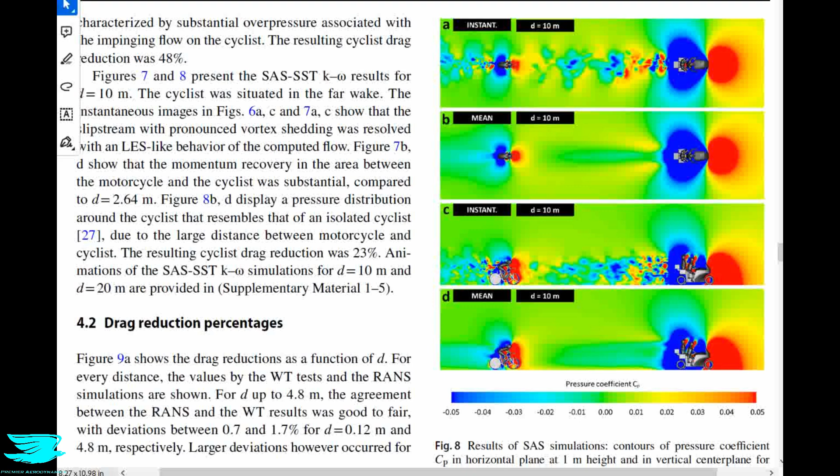That is what we're looking at today. Do the motorbikes in these cycling races affect the outcome of the race through their aerodynamic effects? To find that out, we're looking at this paper called Aerodynamic Benefits for a Cyclist by Drafting Behind a Motorcycle.

While the primary focus of this podcast is how these motorbikes affect a cyclist's aerodynamics and a race's outcome, as you'll see later, the CFD in this paper is really terrible, and in my opinion it has been massaged to make it look better and make it seem like there aren't as many errors as there really are. That's my opinion, and I'll go through why I think that later in this podcast, and you can make up your own mind.

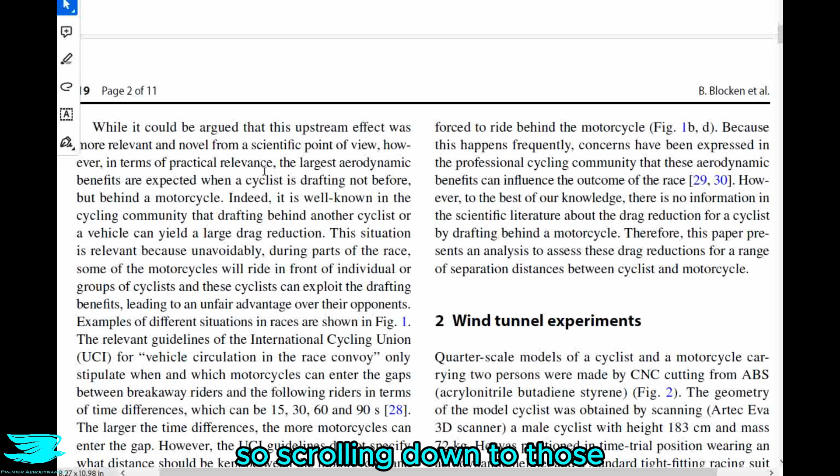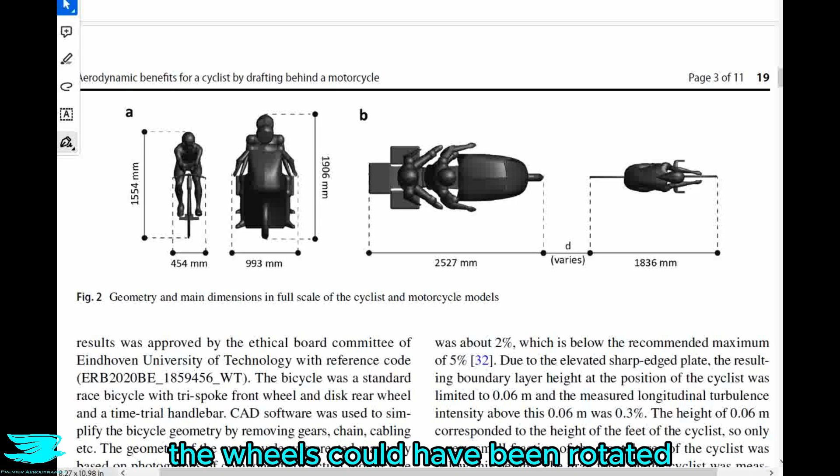Their rider and motorbike wind tunnel geometries can be seen in figure 2, so let's scroll down to those. Here we go. I can't find any mention of the rider moving its legs during the wind tunnel experiments. I mean, it's not a real person, but if you had a moving ground, the wheels could have been rotated, allowing the legs to rotate normally. But in figure 3, we see the geometries installed in the wind tunnel, and it doesn't seem like there's any moving ground—the cyclist is just on a turntable. So that is a major limitation to this study.

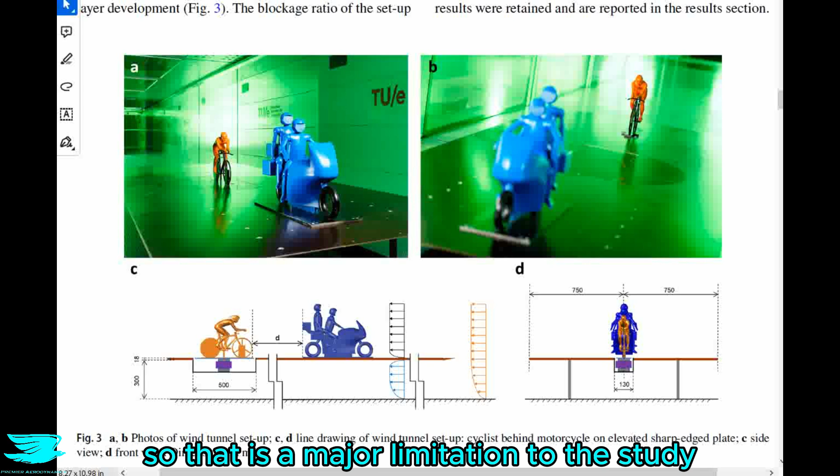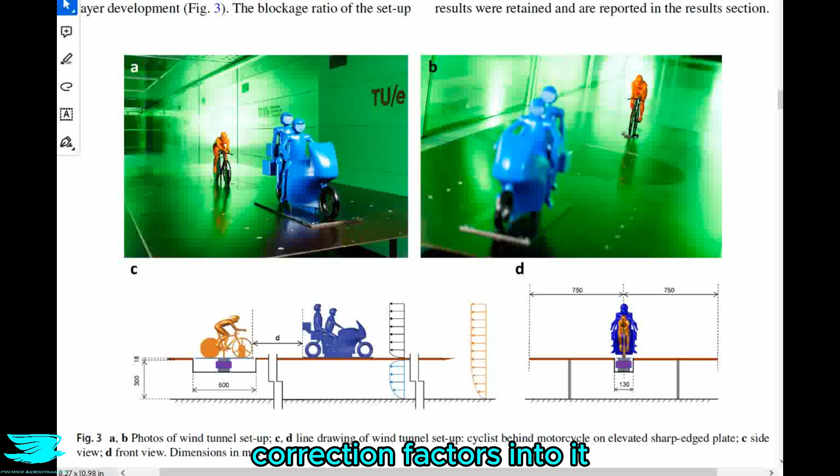The cyclist is static. Nevertheless, it still gives us a good idea about the kind of drag effects we can expect. The cyclist and motorbike setup was a quarter scale setup, resulting in just a 2% blockage ratio, which is really low, and with that blockage ratio you usually don't need any wind tunnel correction factors. The turbulence intensity was 0.3%, much lower than what you'd expect in real life considering the cyclist would be in a regular environment. But because it's in the wake of the motorbike, the turbulence intensity doesn't directly affect the cyclist here.

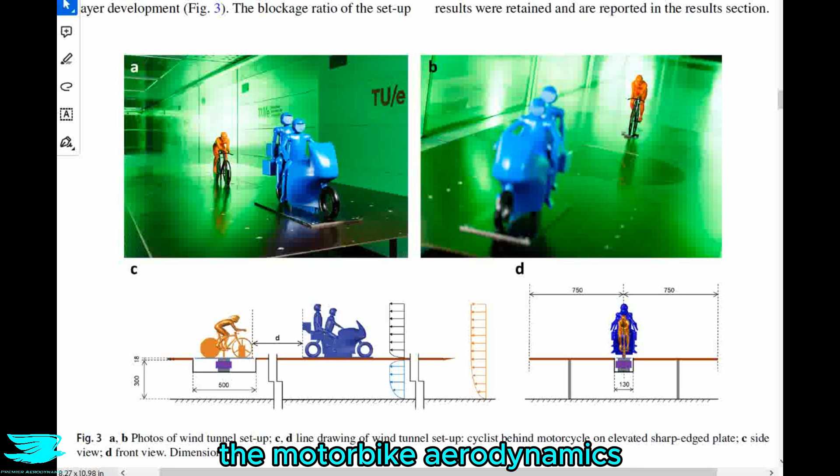So the question is, does the turbulence intensity affect the motorbike aerodynamics, which would then affect the cyclist in sequence?

So the turbulence intensity does affect the motorbike a little bit, but because it is so bluff and the actual geometry of the motorbike setup changes all the time, depending on the people on it and the equipment, I don't think it makes too much of a difference here. This is more a general investigation and not a specific setup for one particular geometry.

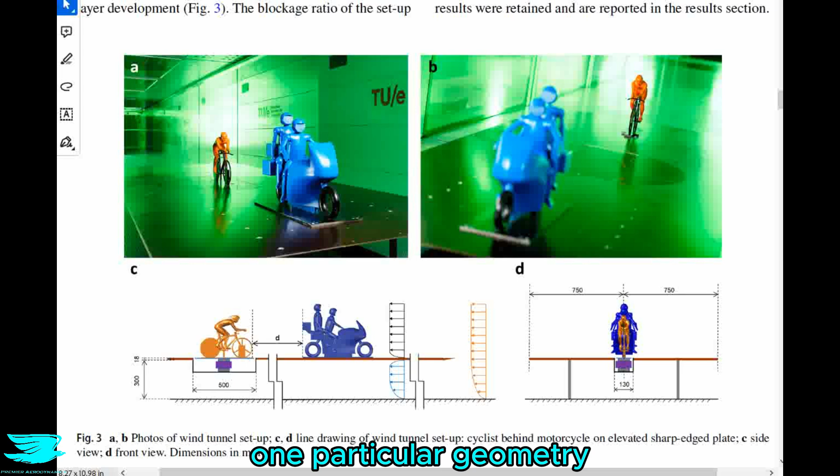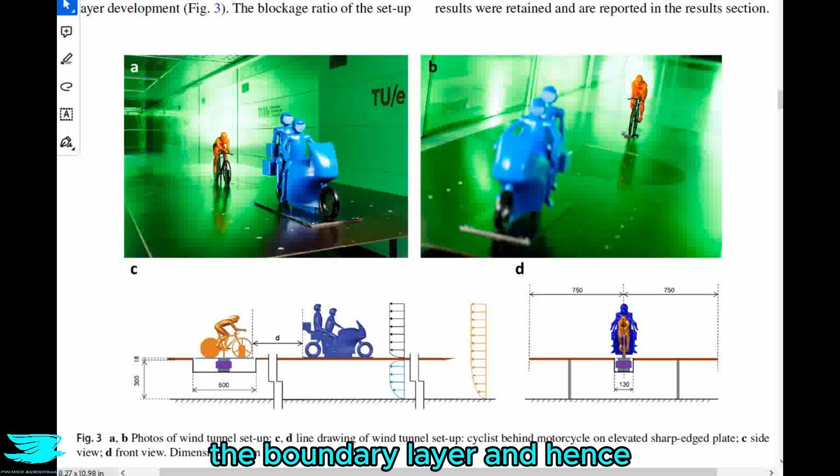So the results here, because of this turbulence intensity level, are still applicable from the point of view of being general. One thing important to note is that the boundary layer in this wind tunnel is a little different to what you would expect. They say that as the flow reaches the cyclist, the boundary layer is building up to about the cyclist's feet. So these researchers say that as such, a very small fraction of the cyclist setup is in the boundary layer, and hence they suggest it doesn't really matter too much.

But I think this still poses a bit of a problem. To begin with, a cyclist won't necessarily see a boundary layer, only if there is a wind with a boundary layer developing over the ground and then impacting the cyclist. So we can conclude right there that with this particular setup, this matches if there is a headwind.

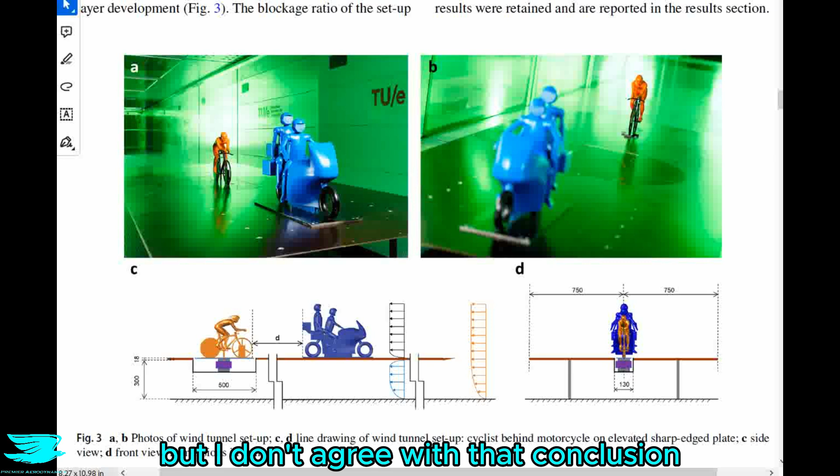But what if there was no wind? Is the boundary layer here still okay? From what I can see from the researchers, it seems like they're implying these boundary layer effects are negligible, but I don't agree with that conclusion, and I'll give you a real life example to show you how connected a boundary layer is to the rest of the flow physics over an object.

Many years ago, I went to one of my friend's offices to go to lunch, as we did all the time, and this time when I got there, he was deep in thought about why something was happening to the flow over an object he was researching. He was investigating the aeroacoustics of cylinders at the time.

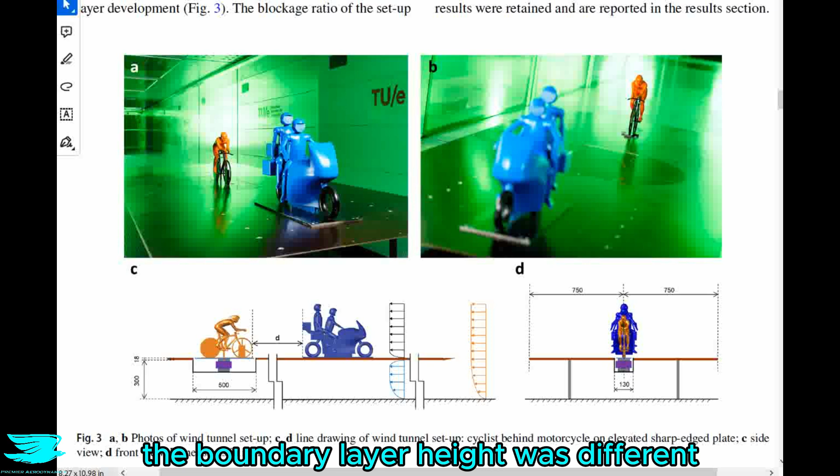What he was finding was that depending on the roundedness of the top of the cylinder, the boundary layer height was different. The strange thing is that the distance between the top of the cylinder and the boundary layer at the base of the cylinder was really far, relatively speaking - like 10 cylinder diameters away. So why was there such an effect? How could the top of this object affect the base so much and the boundary layer?

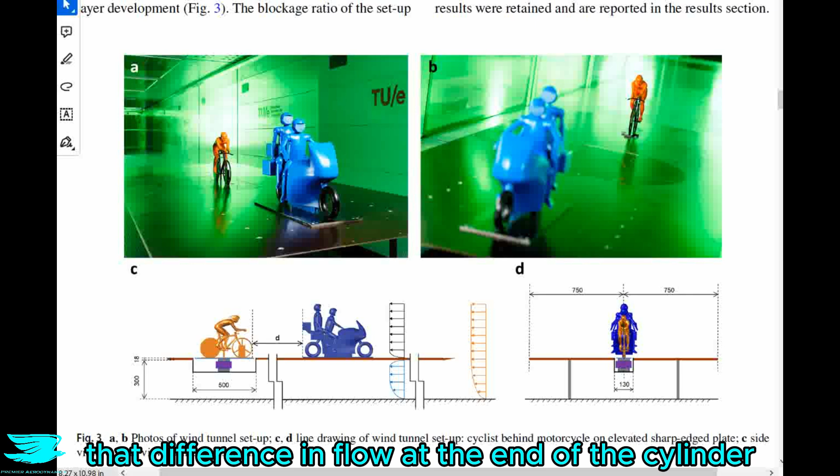Well, we thought about it and we were motivated by hunger, so we figured it out pretty quickly. We found out that the flat end of the cylinder made the flow separate compared to the round top, which allowed the flow to stay almost completely attached. That difference in flow at the end of the cylinder created a different pressure, and hence those pressure differences pulled the boundary layer up by different amounts, making the boundary layer a different height.

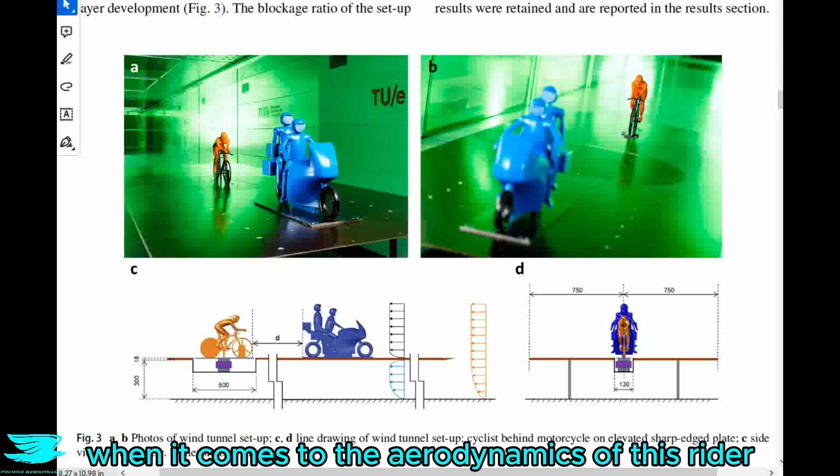So that literally means that something going on at the other end of an object can still affect the boundary layer, which shows you just how connected the flow physics is over an entire object, and the importance of a boundary layer is well known in so many different fields. That is why I'm not convinced that this relatively small boundary layer is negligible when it comes to the aerodynamics of this rider. Its presence could easily change how much the flow gets squashed. As such, I think the boundary layer will introduce probably a couple percent error here.

So anyway, one cool thing they did was test at different velocities, from 15 meters per second to 30 meters per second. They noted that above 20 meters per second in this wind tunnel, the results were now Reynolds number independent, and they reported those in the results section.

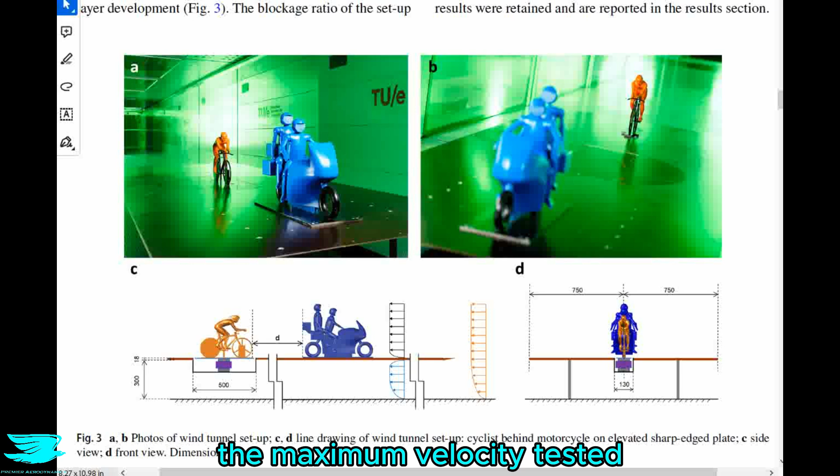Now, when I read that the maximum velocity tested was 30 meters per second, I was a little shocked because 30 meters per second is about 110 kilometers per hour. I thought that was really fast for a rider, so I looked up how fast they do go. It turns out that the average velocity over a 200 kilometer race is about 45 to 50 kilometers per hour. But when you go down hills, they can get over 100 kilometers per hour, and someone even clocked 130 a few years ago.

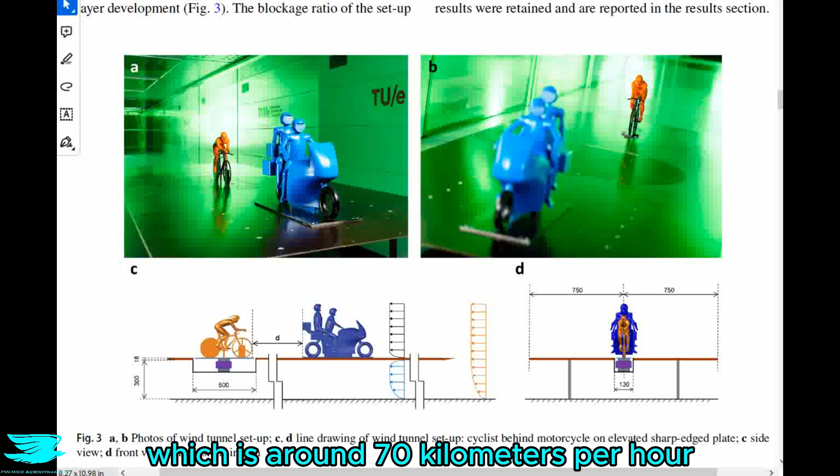So they can get to 30 meters per second, and the Reynolds number independent point here is at least 20 meters per second, which is around 70 kilometers per hour, which is far more normal. So they tested this rider at a number of distances behind the motorbike, with the full scale values corresponding to only 12 centimeters up to 50 meters.

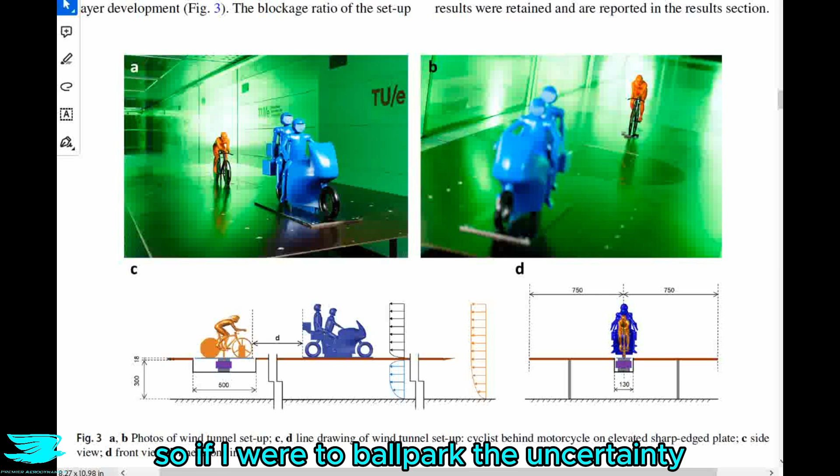So imagine traveling at 70 kilometers per hour, only 12 centimeters behind a motorbike. They say that from their uncertainty analysis, the drag coefficient had an accuracy of 0.8%. That is just the force. There are still other inaccuracies compared to reality, like the boundary layer. So if I were to ballpark the uncertainty of this experiment, it might be around 5% in total to what you'd find actually on the road.

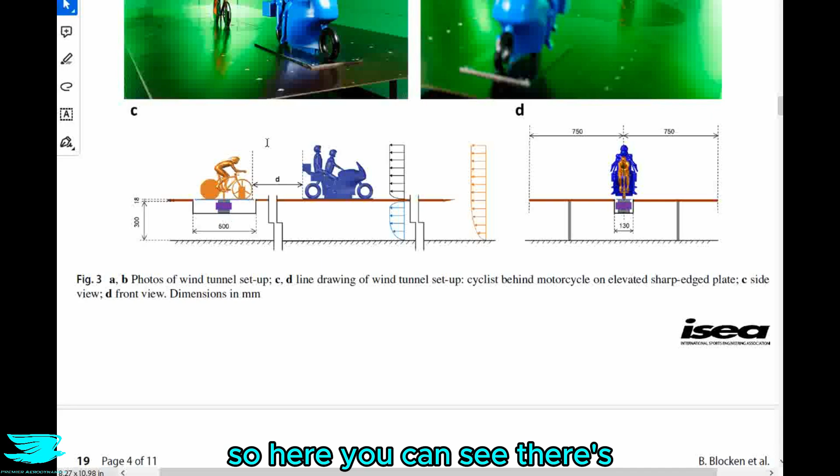With that, let's move to the CFD setup. They did the CFD setup on a full-scale model, and the CFD setup was identical to the wind tunnel setup except for the mounting equipment needed for the wind tunnel. So here you can see there's a few things on the ground which they don't necessarily have in the CFD. They don't need those things.

And in figure 4, we can see their mesh. So one thing that I'm a little curious about is the mesh sizing between the motorbike and the cyclist. You can clearly see that the motorbike is in a square refinement region. That's good. But the downstream region ends quite soon. That's bad. So the cyclist is also in a square refinement region, which also ends quite soon downstream. Then between the motorbike and the cyclist, there is a relatively coarse mesh.

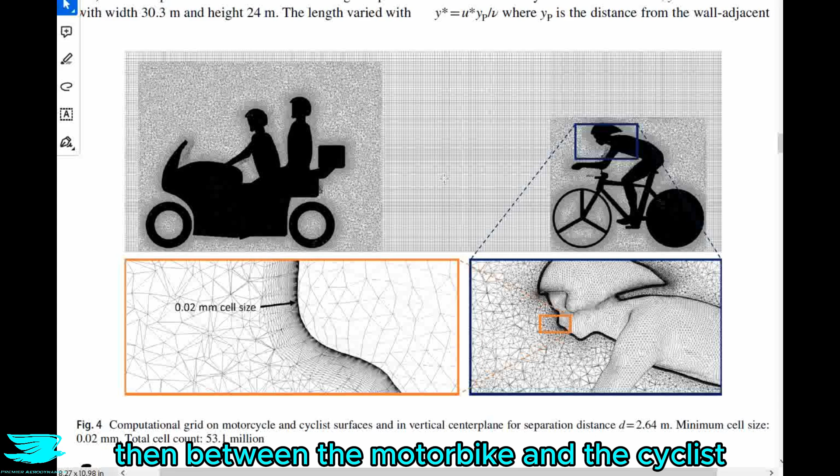So pretty much all CFD simulations need a refinement region in the wake zone to allow the wake to evolve naturally. Here, there isn't this refinement region. And I think this is even more important for there being a wake refinement region here behind the motorbike than most other simulations out there, because the wake from the motorbike is now impacting the rider, which is what we're actually interested in. As such, I would have thought that a refinement region here would have been better, but perhaps they didn't have the cells to spare.

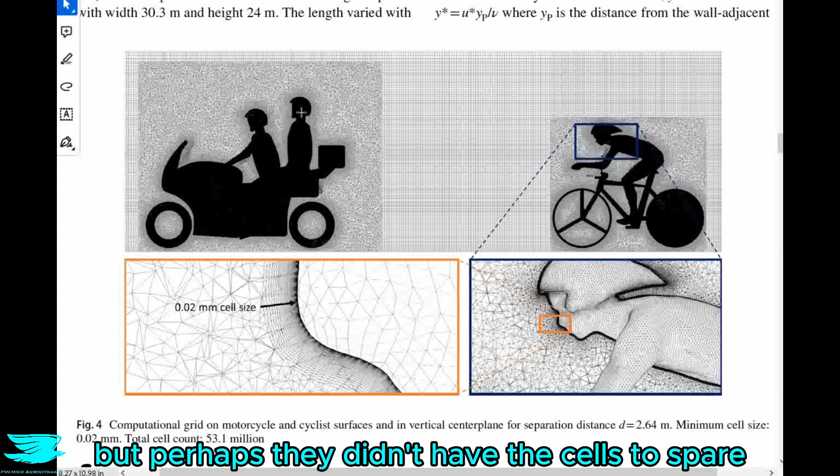Depending on the distance the rider is downstream, the CFD had up to 77 million cells. And they say that based on their grid convergence analysis, which they don't present here for some reason, they didn't need to have this wake refinement zone. But that seems odd to me because pretty much all simulations do need wake refinements, and without the grid convergence info, it's hard to tell what difference this refinement would have made.

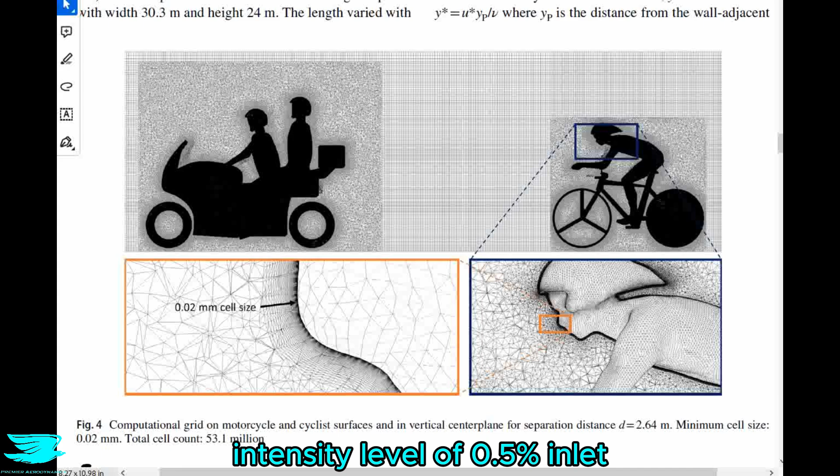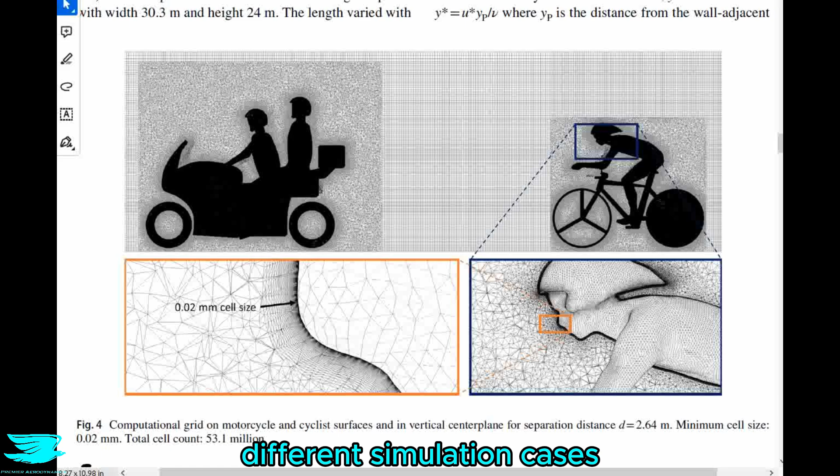One thing that is interesting is that they say that they prescribed a turbulence intensity level of 0.5% at the inlet, which is obviously different to the 0.3% they had in the wind tunnel. But the reason why they prescribed such a higher value here is that the turbulence intensity decays over time, and by the time it hits the motorbike, it is now 0.3%. That's really interesting because you really need to keep that in mind when you're doing CFD. I remember the first time I was doing this I had a lot of trouble with it. I wanted to get 0.8% at an airfoil, and I had to run all these different simulation cases to figure out how much turbulence intensity would decay by the time I hit the wing, and hence how much I had to set it at the inlet.

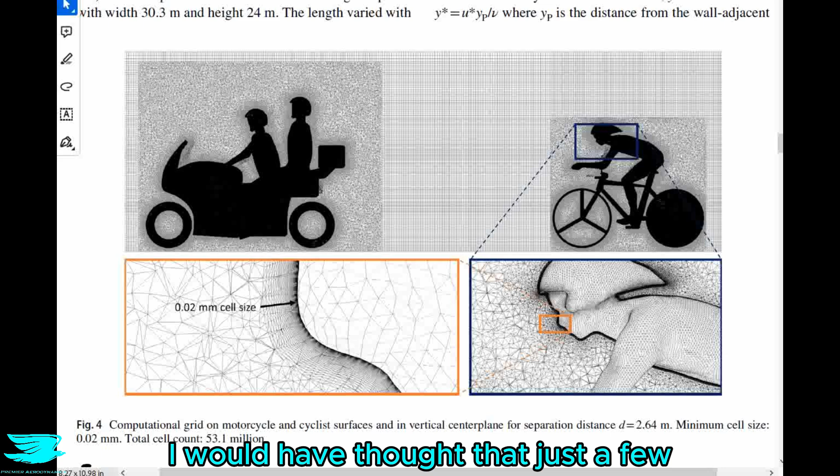So anyway, these researchers did two different CFD setups. They say that for all distances between the cyclist and the motorbike, they did the regular k omega RANS simulation, which means that they are steady state. But for distances greater than 4.8 meters, they then used the URANS k omega SST model. I'm not entirely sure why they did this. They say later on that the RANS was more economical but less accurate than the URANS, which is expected. But even still, I'm not sure why they ended up doing all these distances in the RANS anyway. I would have thought that just a few to compare with the URANS would suffice, but maybe they already had done all these RANS ones and found that at greater distances, the CFD started to deviate from experiments. I don't know.

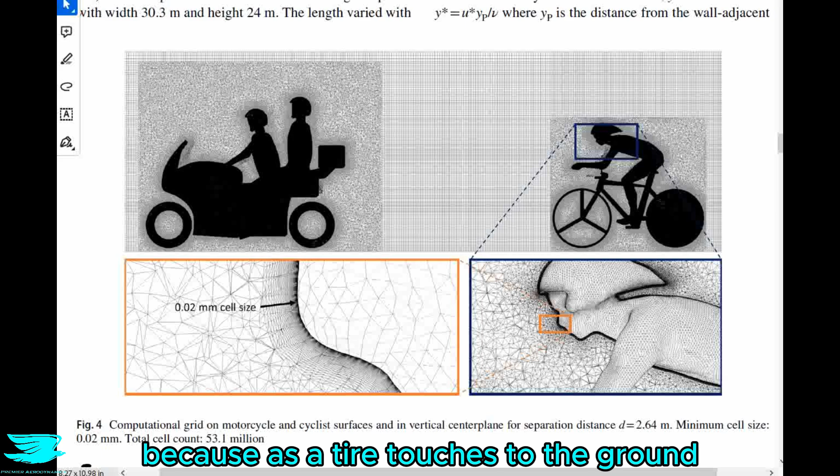One thing that is really interesting to note is that the wheels were not touching the ground in the CFD, but just slightly off them. So you can see here, they are off them, and as is the motorbike. They say that other studies have shown that this makes no real difference. The reason why they wanted to have the tire off the ground is because it helps reduce how many cells you need to use, because as the tire touches the ground, you start to get very small areas that you need to fill in. You can either use large cells with poor quality, like high skewness or aspect ratios, or you can use smaller cells and your cell count will increase. However, given how small the tires are, the increase in the cell count here wouldn't be that much, like maybe 1 million or so.

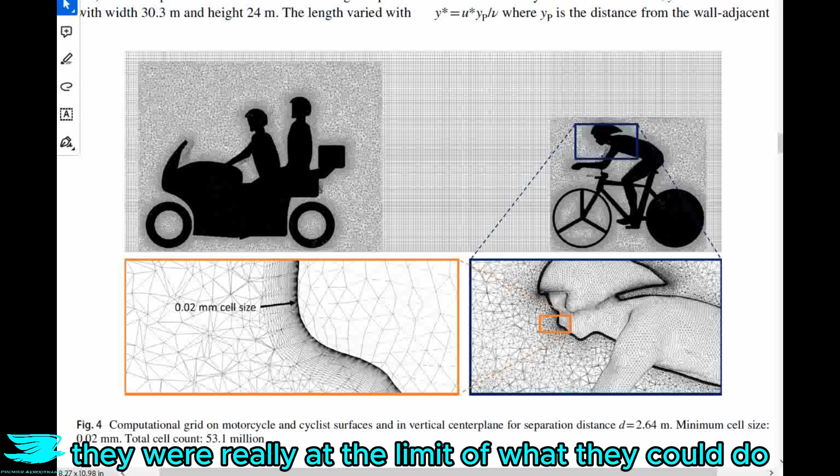And considering that they already used 53.1 million cells, this tells me that they were really at the limit of what they could do with their computing resources. I mean, 1% more cells is not a big deal unless you're already pushing things a lot.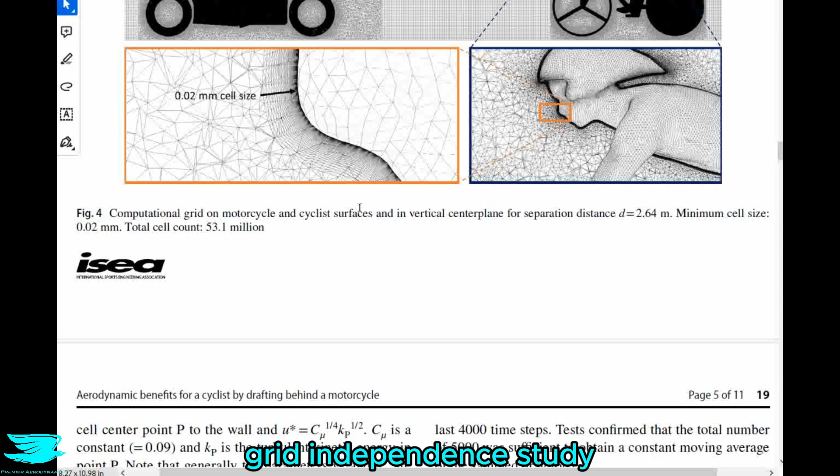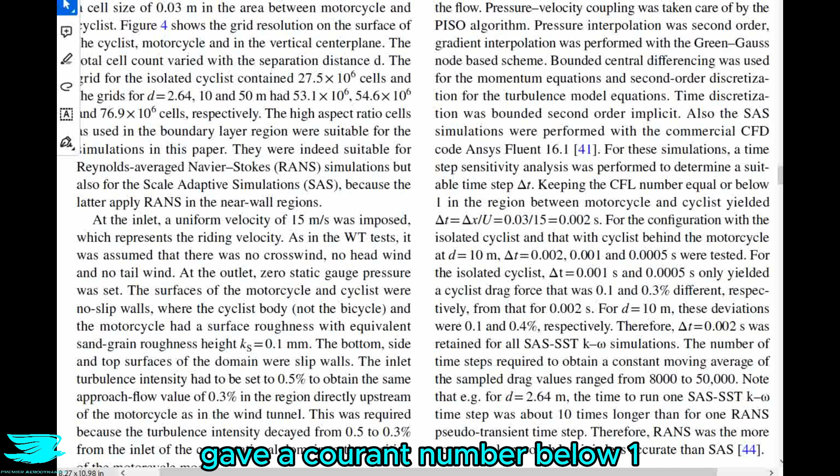They also did a time-step independence study, which is good, and unlike the grid convergence study, they do report the results here. But the thing is, they looked at a few time steps and concluded that a time step of 2 milliseconds gave a Courant number below 1 in the region between the motorcycle and the cyclist. But if you remember, this region was not refined.

So the more I read of this CFD setup, the more I think it is a little dodgy. As I said earlier, even when you don't have an object downstream, you still usually have a wake refinement region. Coupling that with the fact that they do have an object downstream makes me think it's even more important to do so.

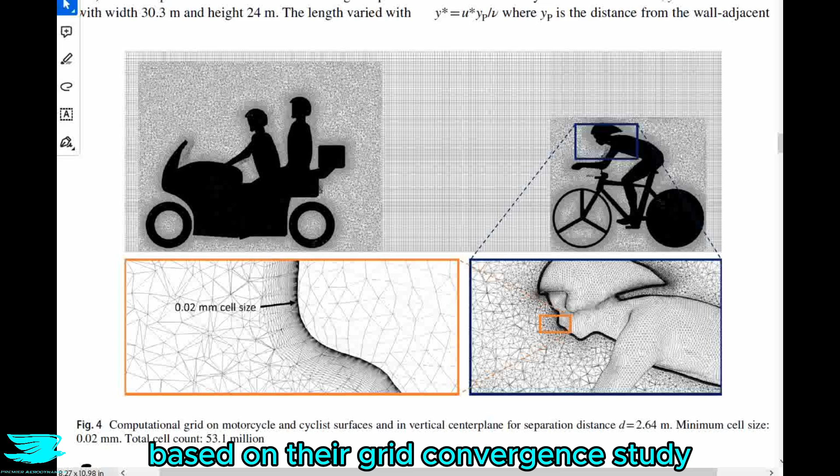They also say that based on their grid convergence study, they didn't need this wake refinement. They don't give any details on that though. But then here they are saying that their Courant number was less than 1, but that is because the cells are much larger in this zone than what they should be. And if you were to go around the actual motorbike or cyclist, the Courant number would be much higher.

I don't know exactly how much smaller these cells are in this region, and hence how much higher the Courant number would be. But just by looking at these cells, I would imagine maybe around a Courant number of 5 or even 10 in this region. So that's a little bit suspect.

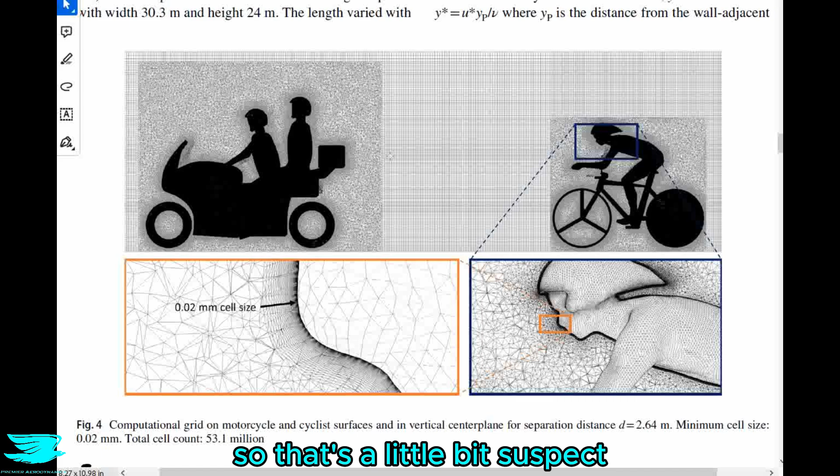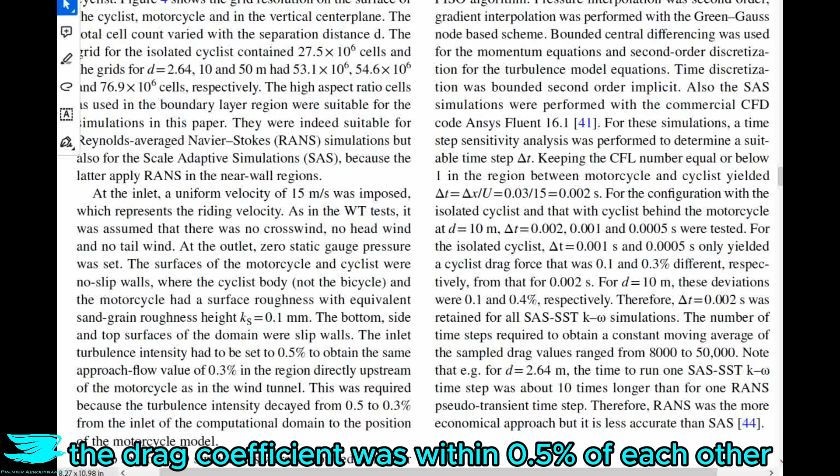Anyway, another weird thing is that they tested 3 different time steps: 1 millisecond, 2 millisecond, and 0.5 milliseconds. And for all of them, the drag coefficient was within 0.5% of each other. And given other inaccuracies in their setup, a time step of 5 milliseconds at the expense of a few tenths of a percent of error doesn't seem to be that big a deal.

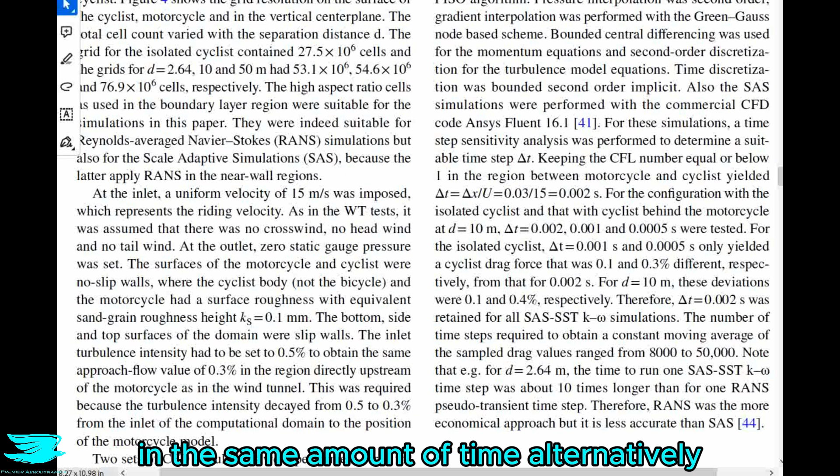I mean, they could have just had a bigger time step, made the tires touch the ground, and hence have more cells, but a larger time step would allow them to run the simulation in the same amount of time. Alternatively, perhaps using some of those resources to refine the wake would have been better.

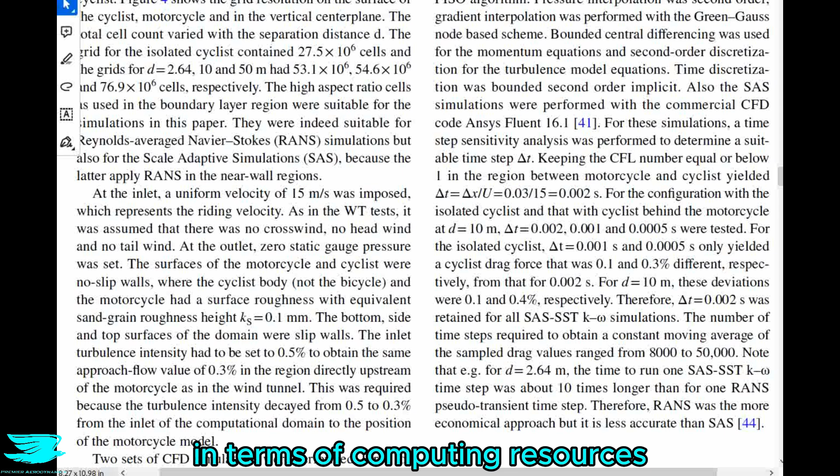As I said, there are some dodgy things going on here, and don't get me wrong, a CFD setup is quite demanding in terms of computational resources, but if you are going to have this level of CFD setup, then you kind of need to match it in other ways as well, otherwise the CFD isn't that good.

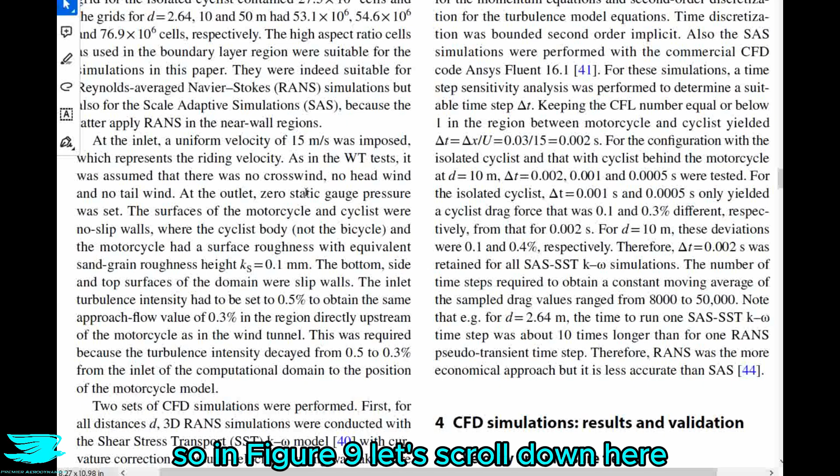Anyway, let's move on with the validation process. So in figure 9, let's scroll down here. We see the drag coefficient reductions for the wind tunnel and the CFD in the top part here.

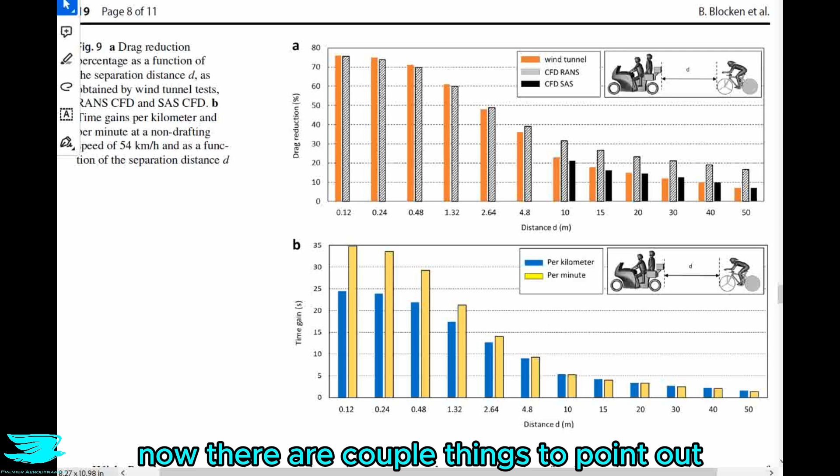Now, there are a couple things to point out. The first is that the SAS CFD drag reductions line up very nicely with the wind tunnel results, these black lines and orange lines. On the other hand, only when the rider is close to the motorbike, as in less than 2.64 meters, do the RANS CFD drag reductions line up well with the wind tunnel results. As the rider gets farther away, the RANS CFD gets less and less accurate. You can see by this hashed line getting more and more different.

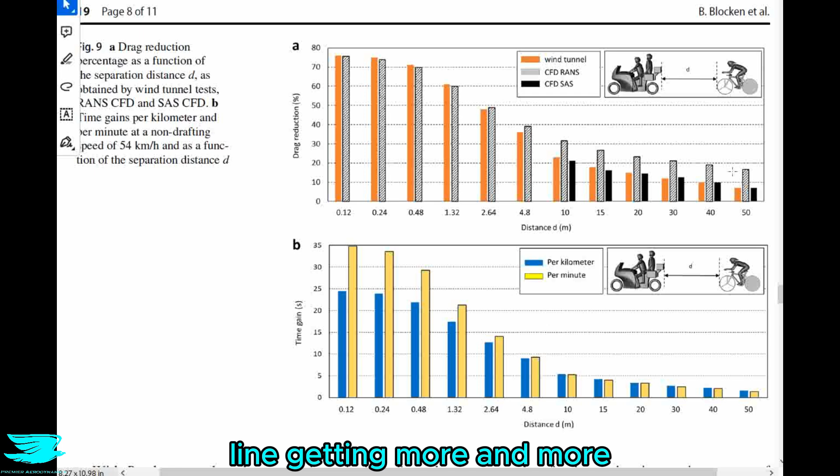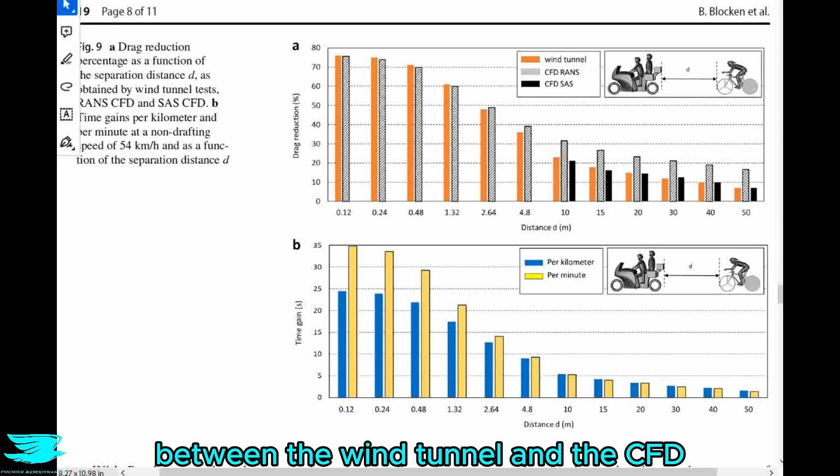So the second thing to point out is that these values are the drag reduction percentages. From what I can tell, nowhere in this paper is a comparison made between the actual drag coefficients between the wind tunnel and the CFD. It's only the drag reduction percentages.

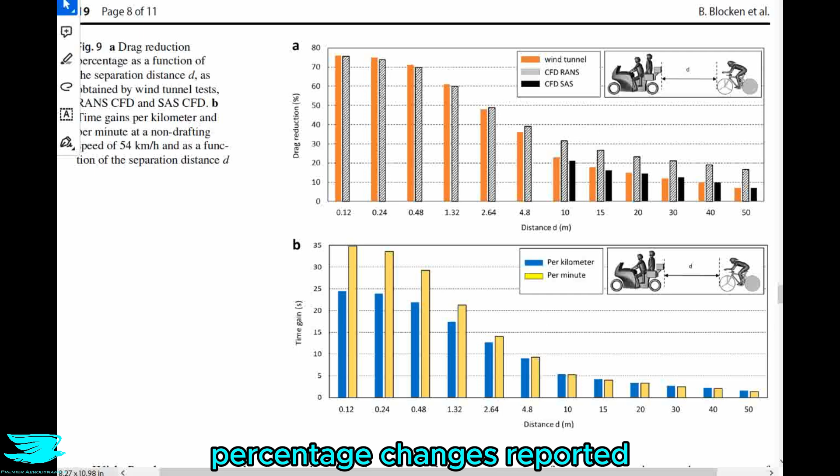That is a problem, because as I've pointed out in other podcasts, when you only see the percentage changes reported and never the actual drag coefficients, this is a very easy way to hide errors in the CFD. Coupling that with the lack of grid convergence data and time-step dodginess, I think the CFD is not nearly as good as what these authors are indicating.

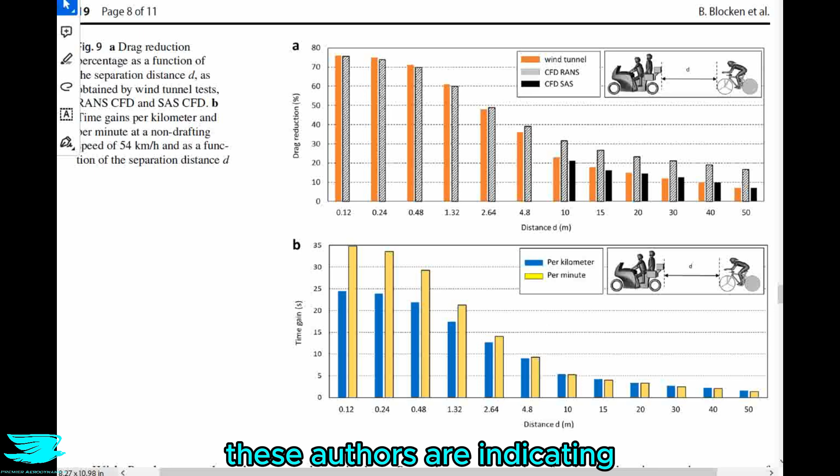So overall, I would rate this CFD to maybe be a 3 out of 10 because there seems to be a lot of massaging of results going on presented here in order to hide things. I could be wrong, but I don't think I am.

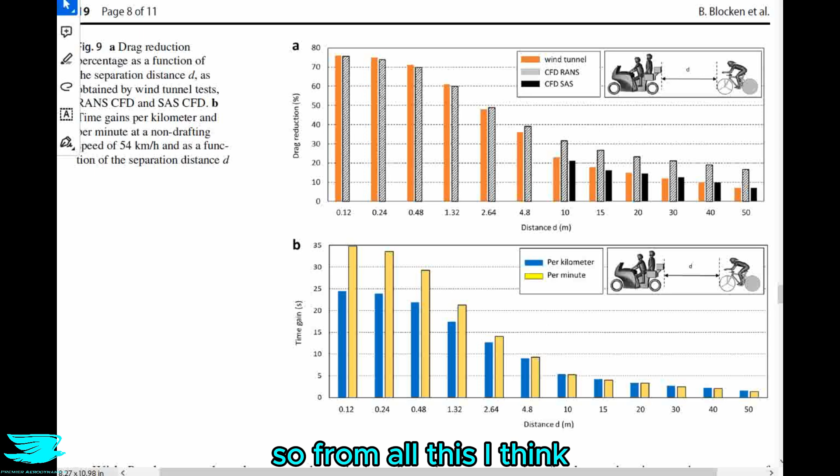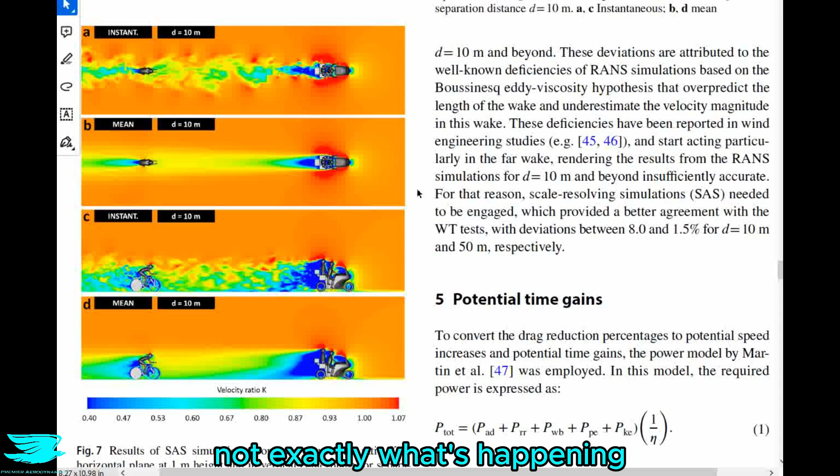So from all this, I think we can definitely trust the wind tunnel results, but from the CFD, I think we can only really trust generally their FlowViz data and just a general indication, not exactly what's happening. I don't think we can trust the drag data at all by itself. Fortunately, there is a lot of good data from the wind tunnel experiments.

So let's jump to figure 7 and look at some of the CFD general FlowViz to see how the wake is generally impacting the rider.

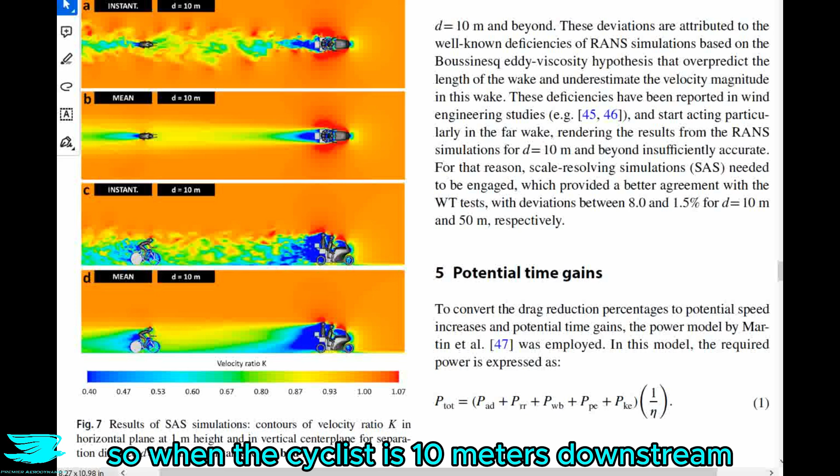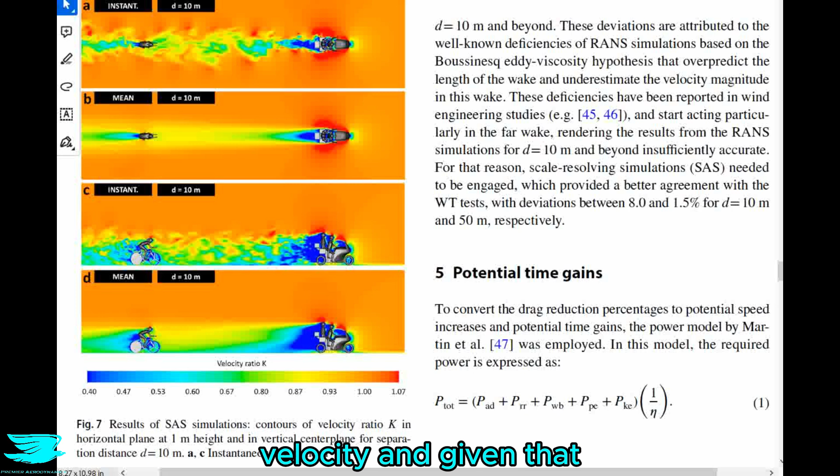Again, the exact details aren't accurate, but the general flow makes sense because the results are what you'd expect. So when the cyclist is 10 meters downstream, quite far downstream, the wake is still quite strong and impacting the rider a lot. The velocity is only around 85% of the freestream velocity. Given that drag is proportional to the square of velocity, that indicates the cyclist's drag will be around 25 to 30% lower just because it's in a slower moving flow.

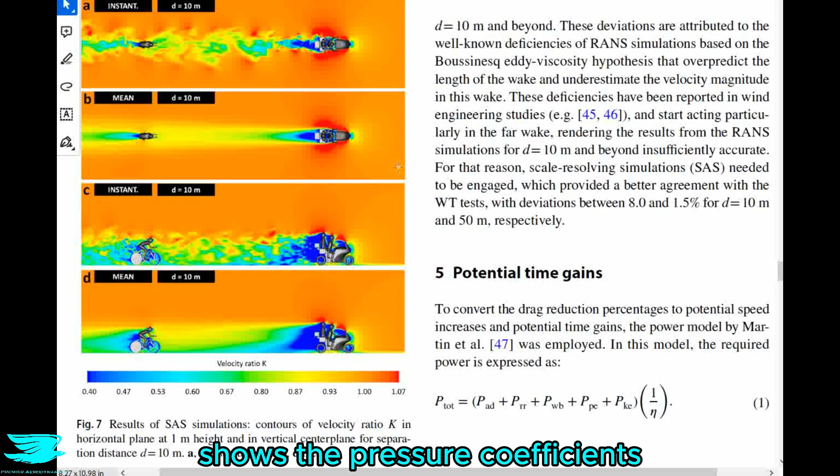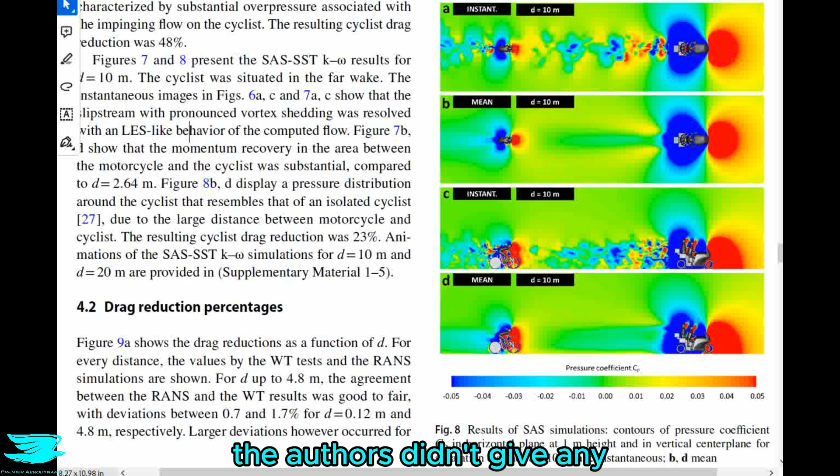Figure 8 shows the pressure coefficients, and I'd say that at 10 meters downstream, the cyclist is encountering a little bit lower static pressure from the free stream flow. Unfortunately, the authors didn't give any more FlowViz data for other distances, which I wish they had, because I'd be interested to see how much the wake impacts the cyclist at 50 meters downstream.

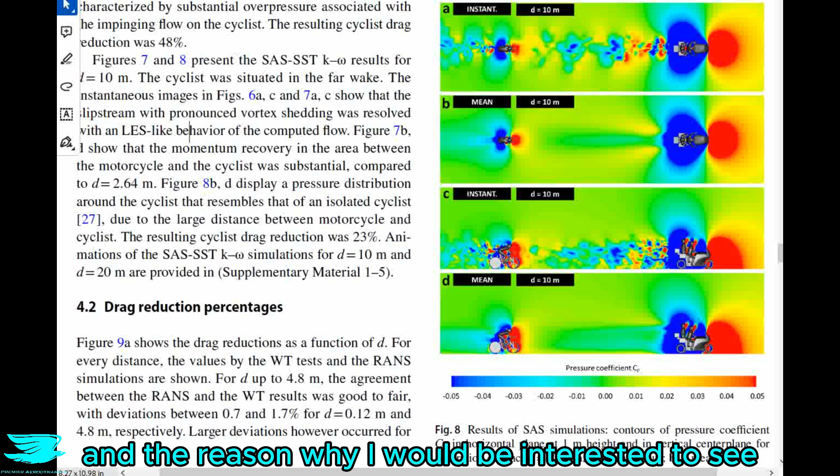The reason I'd be interested in 50 meters downstream is because if you go to figure 9, you can still see even at 50 meters downstream, the cyclist is experiencing about a 7% reduction in drag. That's amazing, because this motorbike is so far ahead and yet the cyclist still benefits from it.

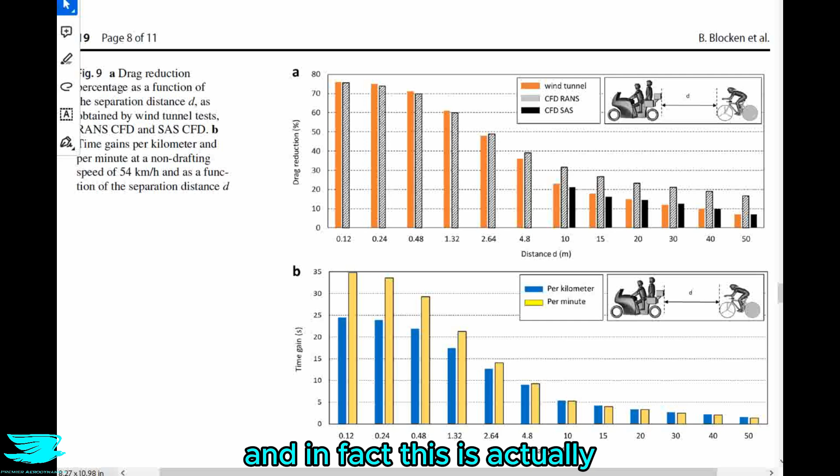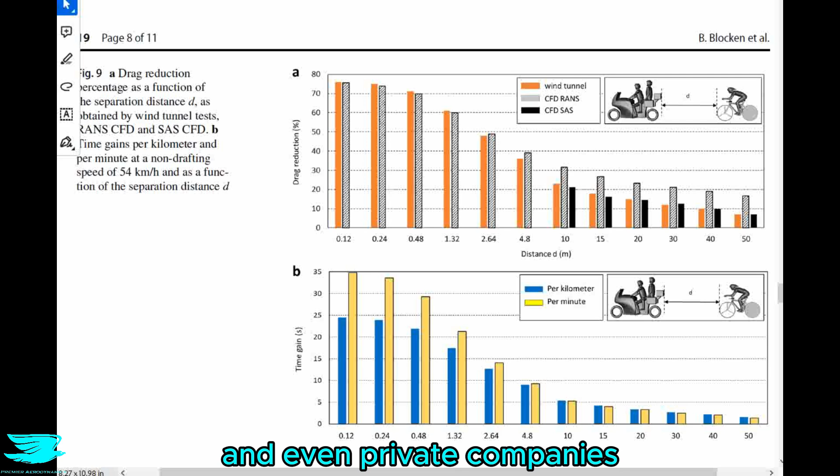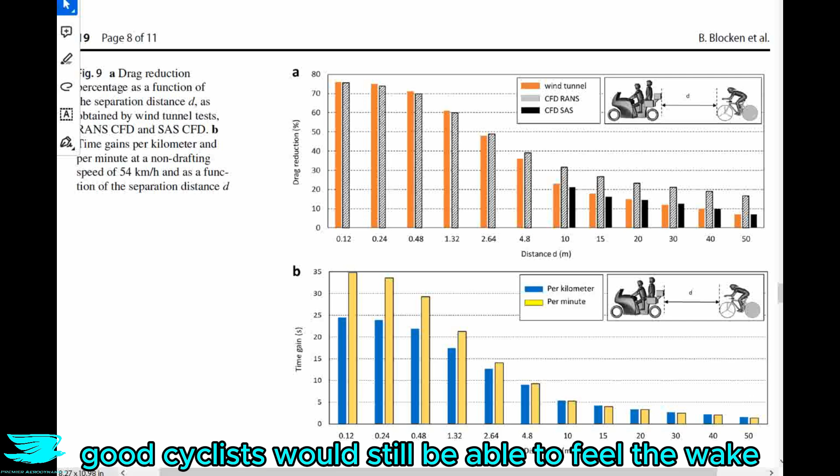In fact, this is an interesting topic, because the more experienced the cyclist is, the better they can feel where the wake is and navigate into it. There's been a ton of research about this, and I know quite a few researchers from different groups and even private companies who've investigated it, and it's remarkable how well cyclists can feel the wake and navigate into it. So even at 50 meters downstream, I think good cyclists would still be able to feel the wake and take advantage of it.

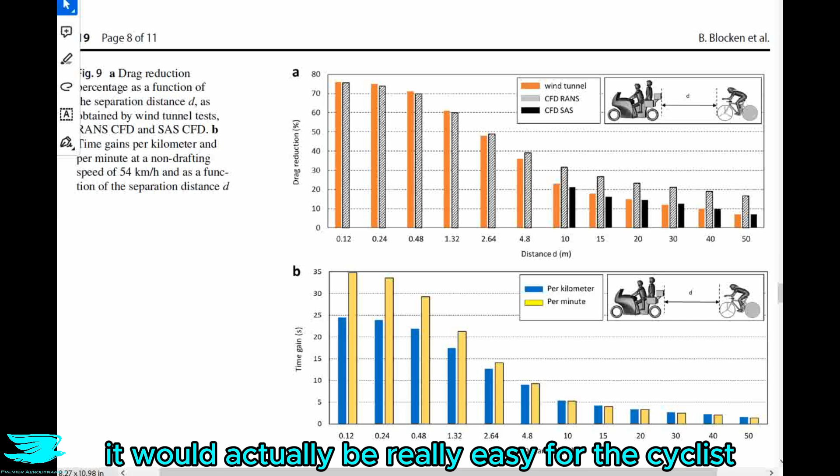Now, if the cyclist is a mere 12 centimeters away from the motorbike, the drag drops by 75%. At that rate, it would be really easy for the cyclist to hit 100 kilometers per hour behind this motorbike. And even at 2.64 meters behind the motorbike, the cyclist's drag drops by 48%.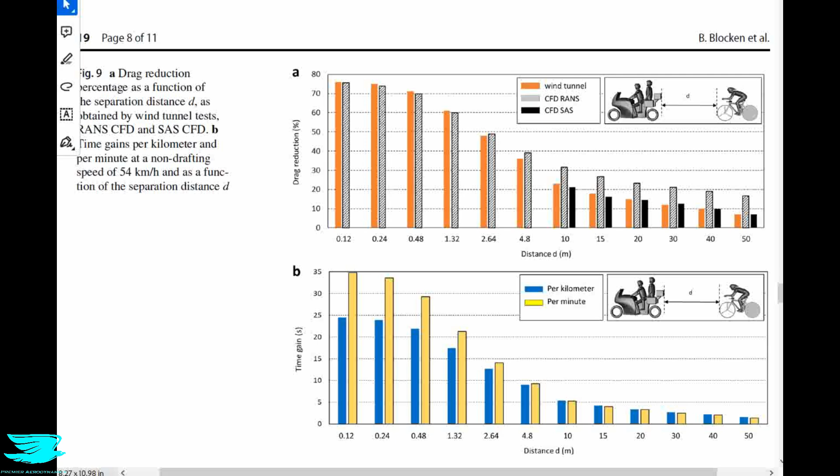That's half. That's insane. Now, these researchers did a rough calculation as to how much that drag reduction would benefit a cyclist in terms of time reduction. In the bottom figure of figure 9, we see that if the cyclist was only 12 centimeters away from the motorbike, instead of taking 1 minute to cover a certain distance, it would only take 25 seconds, less than half the time.

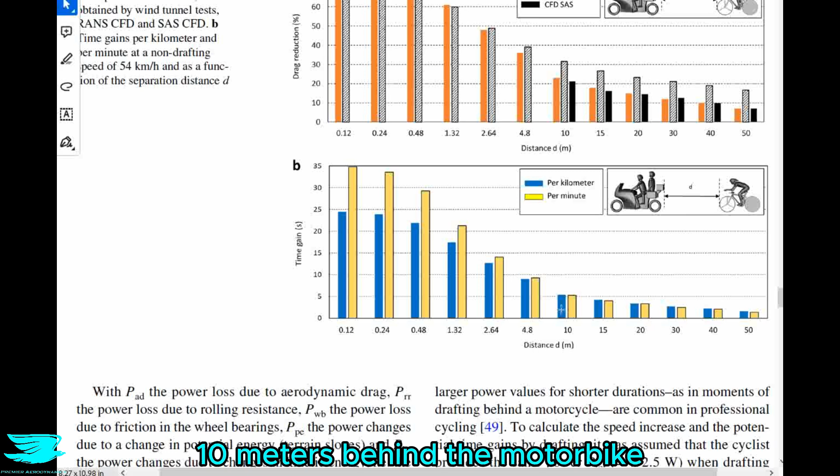So over a 5-minute period of riding very close behind the bike, you'd have a 2.5 minute lead over the rest of the pack. And even at a distance of 10 meters behind the motorbike, you'd only take 55 seconds to cover the same distance that takes 60 seconds without a motorbike, a 10% advantage. So it's clear the motorbike can pretty much control who wins and who loses.

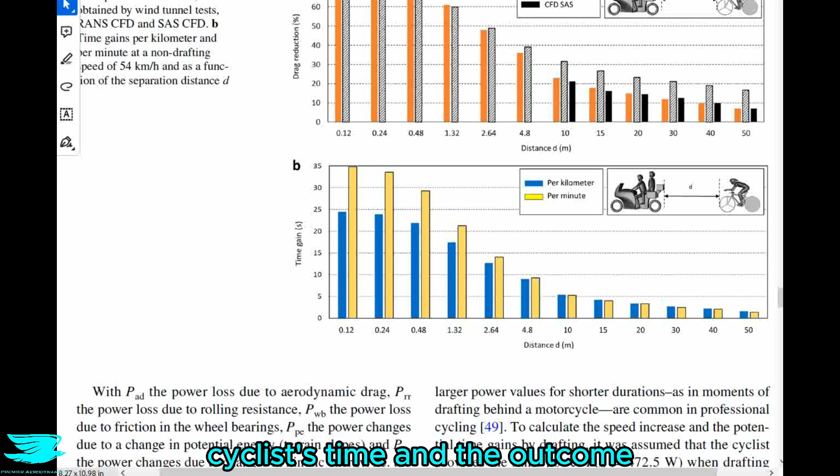I mean, over a 2-hour race, a 2 or 3 minute advantage is a big deal. And with that, we come to the end of this podcast. I really liked the results from this wind tunnel data. There were some simplifications, but I think the overall conclusion that the motorbike can greatly affect a cyclist's time and the outcome of a race is very valid.

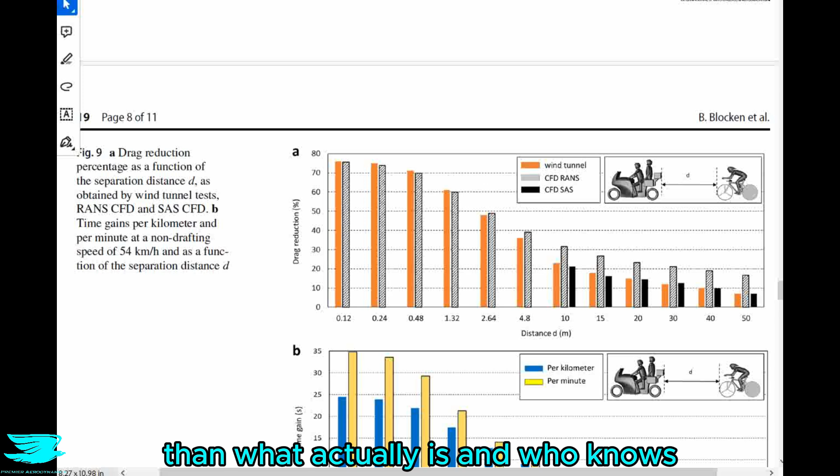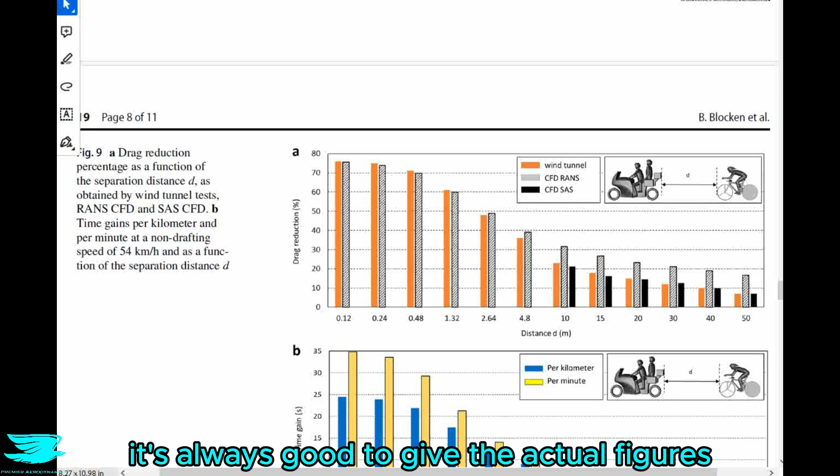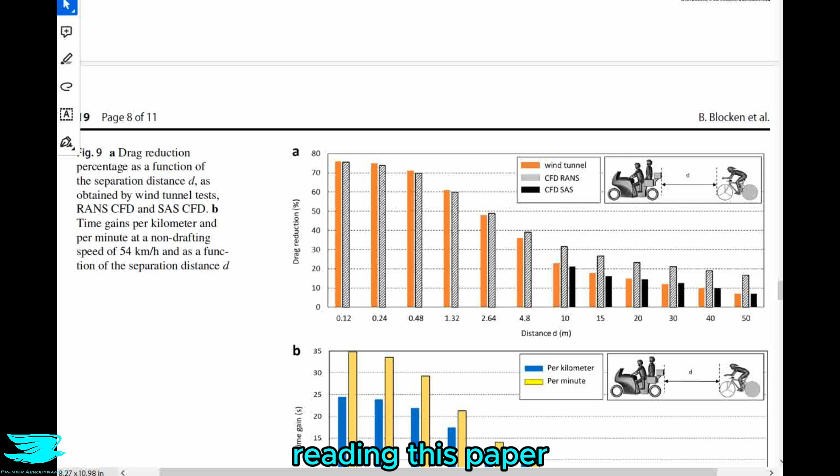As for the CFD, well, I think it was one of the worst ones I've seen, primarily because of what I think is massaging of the data to present it as being much better than it actually is. And who knows, maybe this CFD will take the prize for worst CFD of this year's podcasts. The moral of the story is, when it comes to any drag or lift data being reported, it's always good to give the actual figures and not relative changes. If you see relative changes, that's a major red flag. It indicates they're potentially trying to hide errors, and that might work for inexperienced aerodynamicists reading this paper, but for those who've been around the barbecue a few times, you can sniff it out.